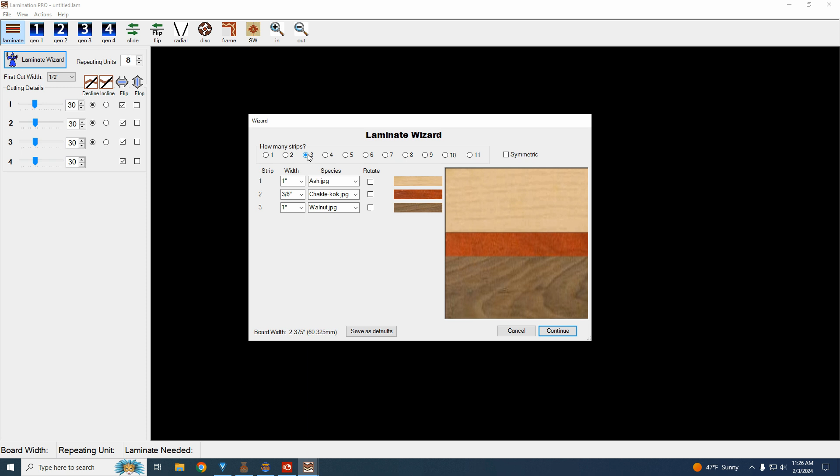It comes up with 5 rows, but I want to do 3. I want to make this as easy as we can, and I want to make the top and bottom board symmetrical. This says symmetric, now it's symmetrical, and I'm going to change that center one to bloodwood because I've already made a turning that I'm going to fit this in Woodturner Pro, so you can see what it looks like and how you can make this fit in a certain place and at least get it really close, and then work out any issues you might have.

All right, I'm going to hit continue, and you're going to see a long strip that's got the 3 pieces of wood there, and then there's a 30-degree angle on it, and that's what I have set here. We're going to keep the 30-degree angle.

The width of this kerf, that is what you decide for your blade. If you go to File, Options, I can choose whatever size I want. If I'm using a wide blade, that's 1/8 inch. If you don't even want to see the blade, which you could do this without seeing the blade, as a matter of fact I usually do, or you can make it real small and it would look like just like a line. But you'd have to center your blade on that kerf right there.

For what we're doing, I want that kerf to show up because when we go to the second generation, it actually becomes kind of hard to see. This actually becomes an advantage to being able to see what you have. So we're going to go with that.

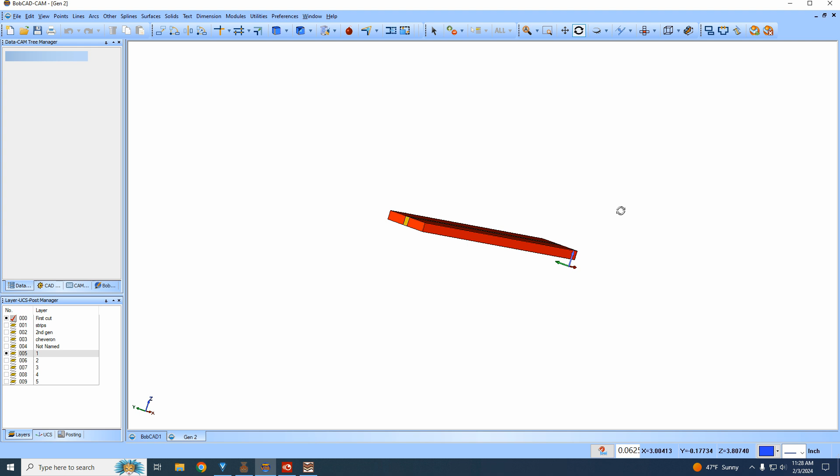The strip's 1/2 inch. Let me show you what that looks like in my CAD program. I think I'll be able to show you what's going on easier because I'll have 3D parts. And I've drawn this up. That's that strip again right there. Now you see it's actually a 3D image. And it's always handy to see things in 3D.

It's not the same color, and the reason is depending on the background and depending on what color I choose, it can almost be the same color as the background. I do this so I can see it, not because I'm trying to make that shade of color in there. So that's what that would look like.

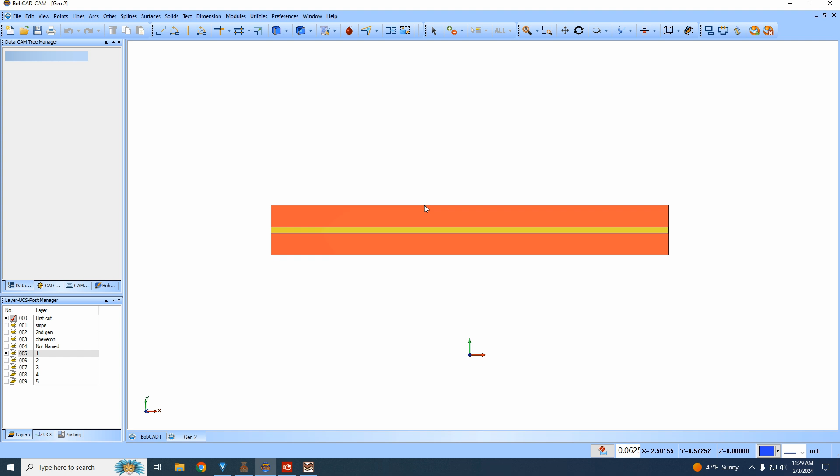Now let me put those same kerf lines in there. There's the lines, and these are actually individual pieces that I modeled up and stacked together. So that's what that looks like there. And let's see if we're at the same point here, and we are.

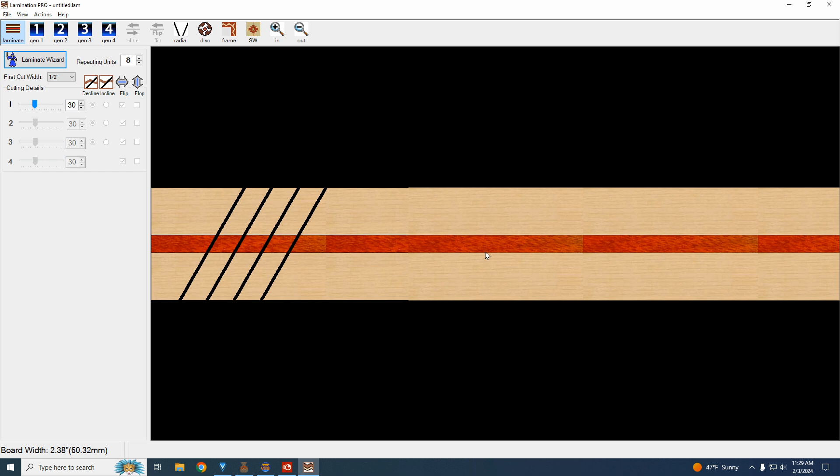So we're going to go to the first generation. Looking at the first generation, forget about these lines now. Those lines are the next cuts you make for generation 1. Come over here to the right where I have my cursor there. From here to here, that is how wide that would be if you were making a chevron.

And it's kind of narrow. That's the default - it comes in at 1/2 inch. I'm going to show you that you can leave this, and when you're finally done with the part, you can adjust it to fit maybe a pre-existing size and the amount of segments that you decided you want to use.

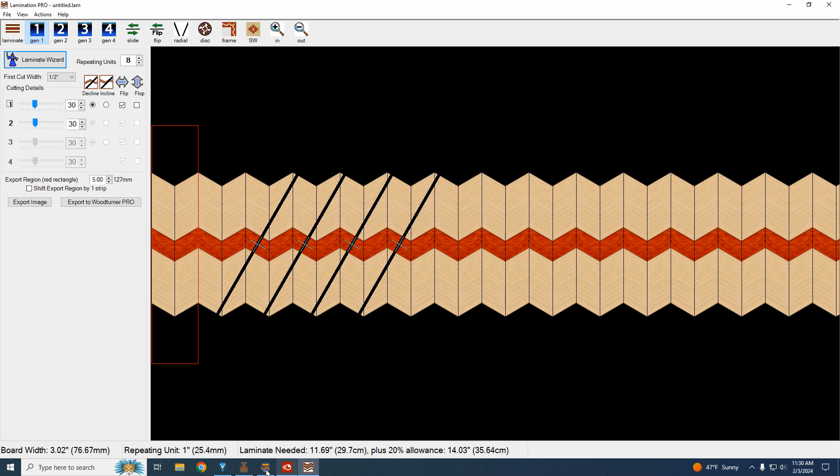Let's go back to the CAD program. By the way, this is called BobCAD, and I purchased it a number of years ago to work with my CNC machine for modeling and sending the code to the machine. It wasn't real cheap, but it wasn't like a lot of them either. Today it's gotten a lot more expensive, so I'm still using the old version.

So I went back to Lamination Pro, and we just have the basic board glued up. I'm going to show you what happens here. I'm going to skip back to my CAD program. I think it'll be easier to see it when we go to Generation 1, because once you go to Generation 1, it kind of shows them already glued together, and you just have to assume you know which way you do that. So I'm going to show you exactly how you do it. So there is your cuts for Generation 1.

They're cut 30 degrees. They're also cut at the width that you come up with in this little box. Going back to my CAD program, here's one of those pieces that was cut out of that glue up strip - 30 degrees. You take that and basically stand it straight up, tilt it 30 degrees to the left, and here it is here on the left side of this, and you're looking at a chevron.

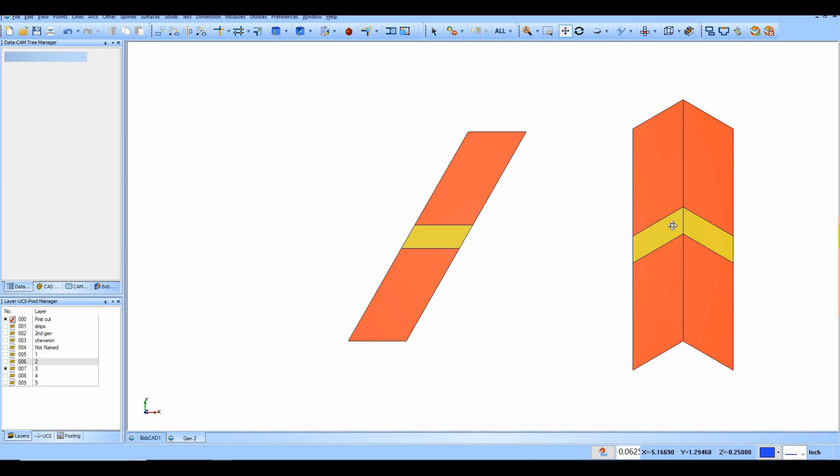So when you do stand this one up, you flip another one over on this edge here, and it gets a mirror image of it. You now have what you need to make Generation 1, and that's a chevron.

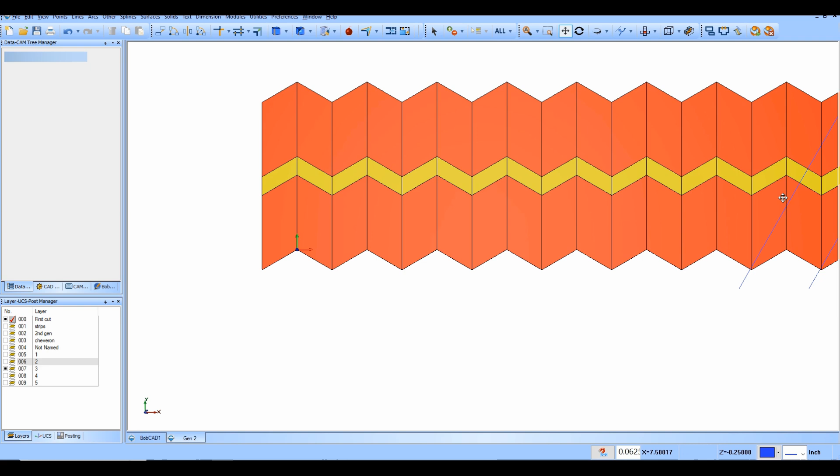We'll go ahead and zoom out, and to go to Lamination 2, the Generation 2, you'll have multiple sections that are glued up like I showed you over here, like that. You glue all those together, and then you need to make another cut at 30 degrees.

I'm showing you here because I also think it's easier. The way you do it is you take the declining edge that's on this side here. What I did was I just drew an X from this corner to this corner, and from that corner down to that corner. That becomes the center of the whole piece.

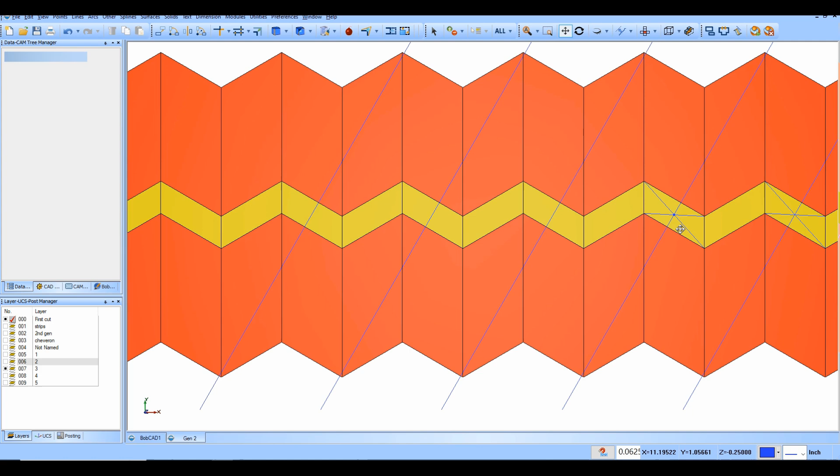Then you draw a very accurate 30-degree angle, or set your saw up to cut right through the center of that - that's the center of the blade. You're not trying to leave that line. You have to go divide the width of the blade and cut right through the center. Then you'll have those pieces.

Go back over here where you can now see what I'm talking about. There are all of our pieces, and here's that X again. These lines just automatically show up if you're doing the second generation. So that little piece that you're looking at here, I'm going to show you what that looks like in my CAD program. So we'll go back over there.

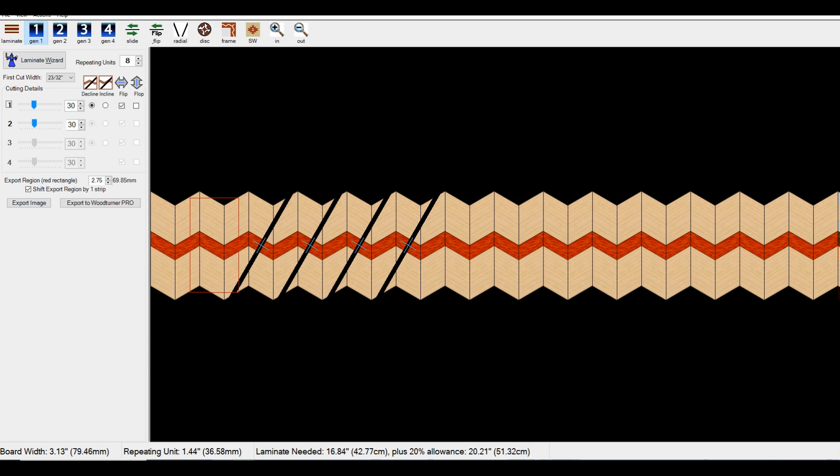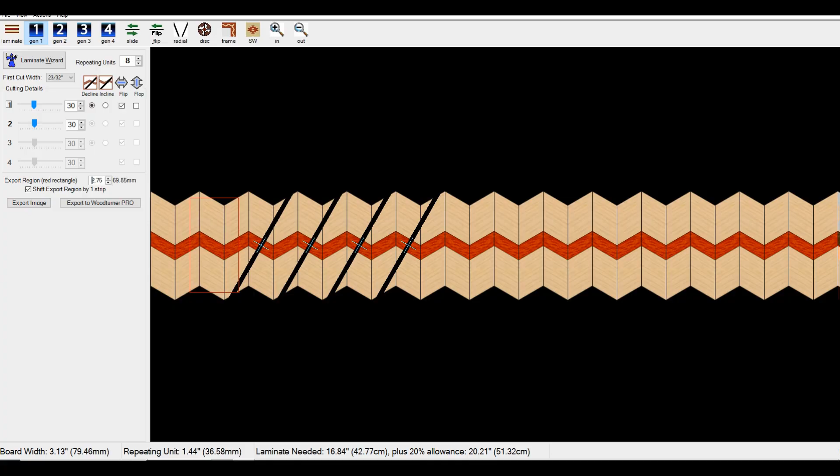And we're going to turn this off, and I'll bring this one up, and there is one of those pieces. Here it is, like that. This is what it looked like over in Lamination Pro. It may not be exact because I just kind of sketched out this piece in my CAD program, not using these dimensions. But if you look at this with the little ear sticking up and one down here, you've kind of got the same thing here and here.

So you do the same thing as I showed you for Generation 1. You rotate that up this direction, and going over here, you've went ahead and mirrored the second piece and glued it on this side, like that. That's pretty much all there is to it. Now that is for your second generation right there.

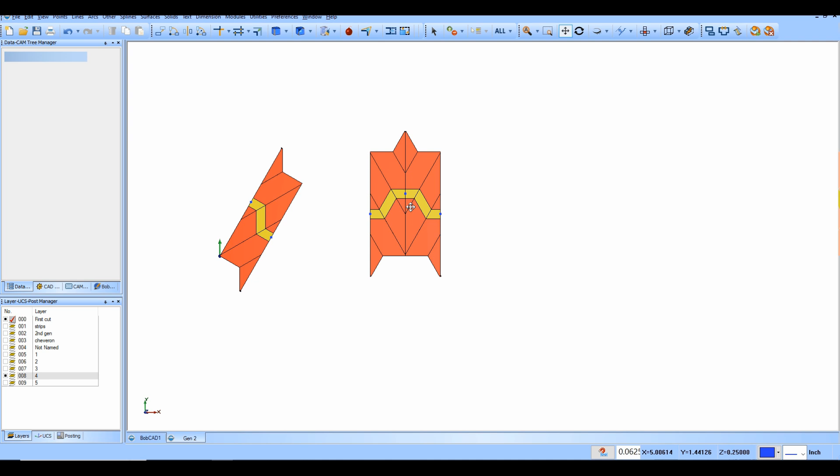And we'll go ahead and bring that up. That is what it looks like. And you don't glue this together - I'm just showing you what this looks like if you were to flatten that back out.

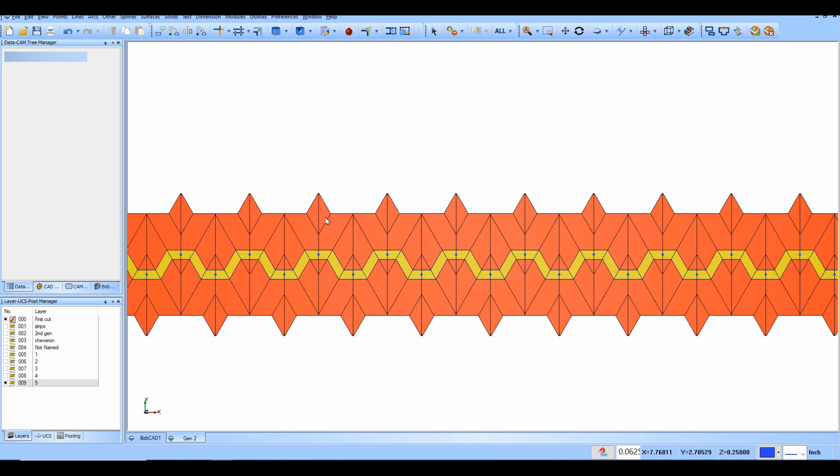If you can imagine that wrapping around your turning. So that's all the segments together. If you want to go to Generation 3, then you have to glue it like that. We're not doing that at all. We're just sticking with this right here. So you make 12 of these and get the angle on the side. You now have a second generation ring. That's pretty much it right there.

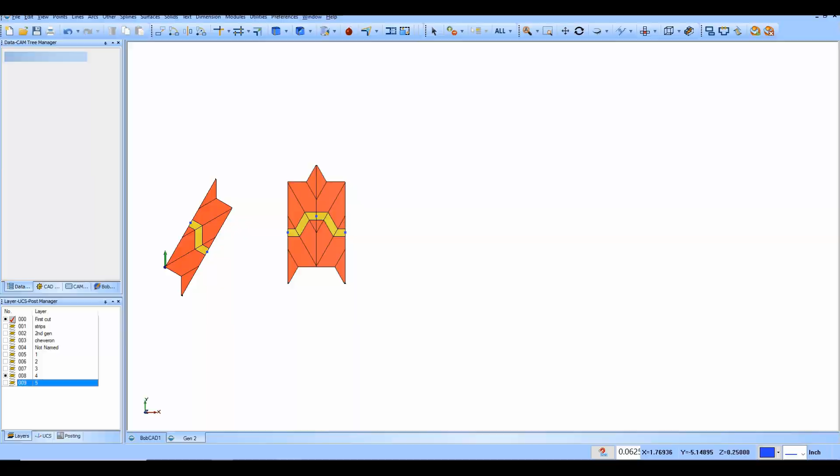And now what we're going to do is we're going to go ahead and import this into Woodturner Pro. So this is actually a turning that I did a year or two ago, and what I've done is changed this section here. I took the feature ring out that I made for that one.

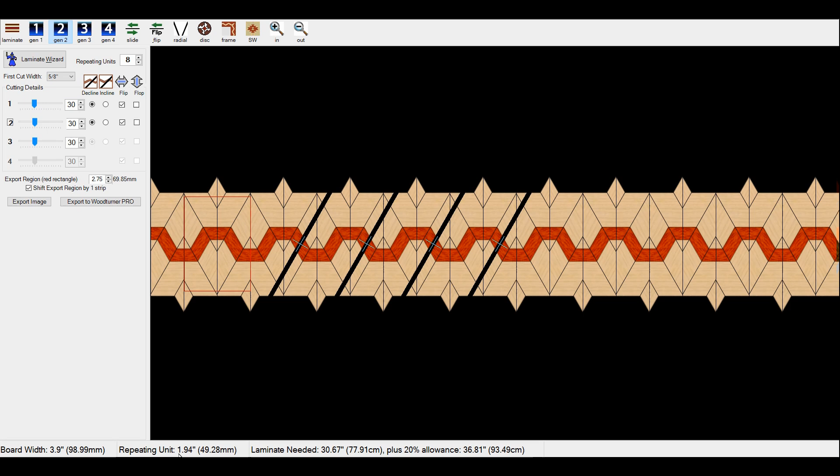And that just pulled itself down, and it's going to cut everything away that we need to do. And then right now the repeating unit is 1.94, and I think I wanted 2.28. So we're going to change this and see if we can get to there. That's 2 1/16, and let's see. We did it. 2.28. It's exact. And I had a little bit to do with that.

But if you're close, you want to keep what you have here in Lamination Pro and just glue the ring up and then make adjustments afterwards. Over here where it says shift the region, you want to click that and it'll bring it in there and you'll see everything you're cutting.

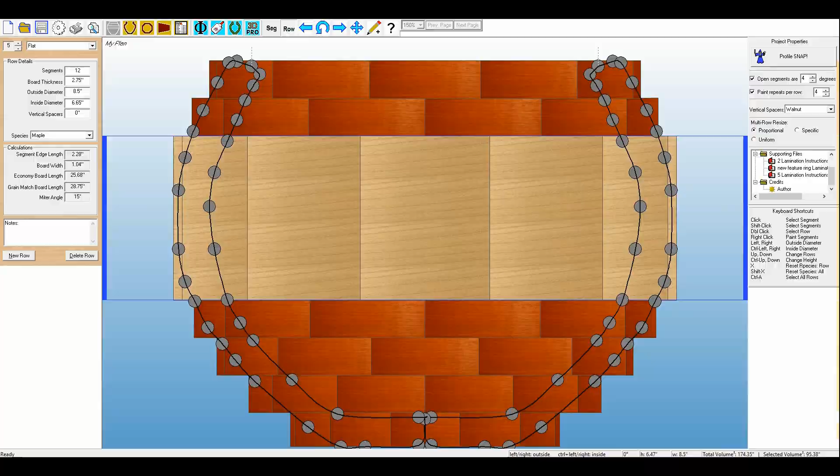So now here's something you've got to watch out for, and I've done this a couple times not correct, but you need to highlight where you want that feature ring to go. If I put it here, it's going to try to fit there. So double click that so you can see it's drawn a box around it. Go back to Lamination Pro and say Export to Woodturner Pro.

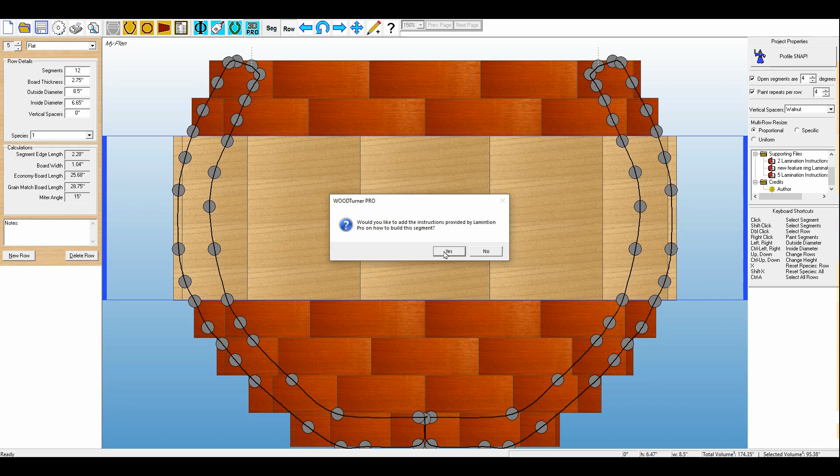So I've done that, and I've clicked on here, and you can see I've got 2.28 and 2.75 exactly. I'm going to give it a name, and you can call it feature ring. I just put a 1 on here because I don't really want to save this. I'm going to click it, and it says would I like the instructions, and I'll say yes. There's our feature ring right there. Fit perfect. Here's the instructions. See, I got a bunch of them in here.

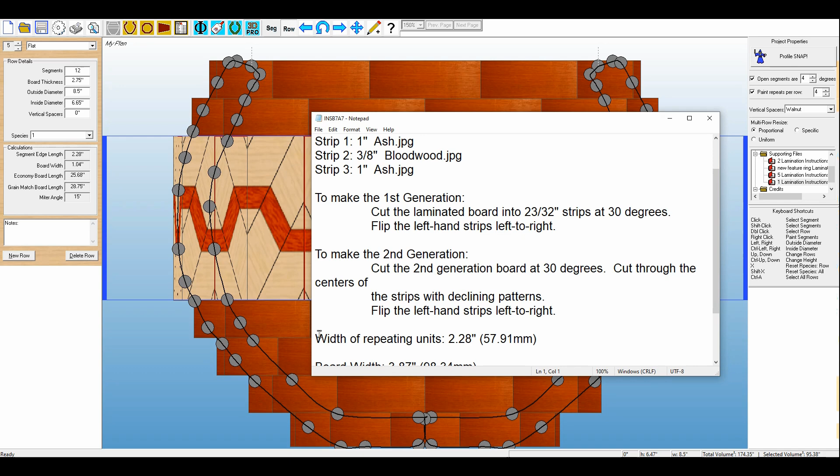It's 1. So I have ash and bloodwood, and the first generation says to cut it at 23/32nds, and the second generation, cut the generation board 30 degrees, cut through the center like I showed you of the strips with the declining pattern. Flip left hand strips to the right and glue them together, and you will now have your feature ring pieces, and you cut your angle on it based on the number of segments you're using. So that's pretty much it.